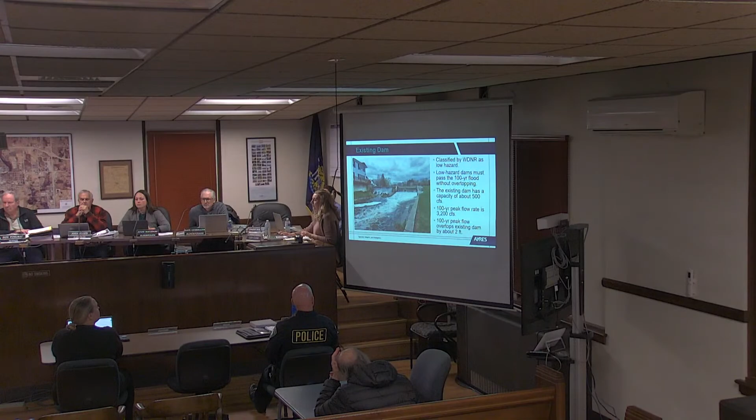So to start with going over the problem with the existing dam, it's classified by the Wisconsin DNR as a low hazard dam, determined in 2015 when the dam failure analysis was done for the Mullet River Dam. Low hazard dams by Wisconsin statute need to be able to pass the 100-year flood without overtopping. The 100-year flood is a flood that's large enough that on average it's only going to be exceeded in magnitude once every 100 years.

So you can get floods of that magnitude occurring more frequently. It's not like once you have that 100-year flood, you're not going to get it for another 100 years, but on average, that's a flood that's going to be exceeded in magnitude once every 100 years.

So the existing dam has a capacity of about 500 cubic feet per second. That means it can pass 500 cubic feet per second through its existing spillways before it starts bypassing around the dam, overtopping. You can see the existing dam has two spillways. On the picture left side, next to that building, it's just a fixed crest overflow. On the right, it's a strange and unique timber structure with a concrete sill, but based on my understanding, those timbers that the water is flowing over are never removed. So that's the existing dam.

The capacity is only 500 cubic feet per second, but the 100-year peak flow rate is 3,200 cubic feet per second. That's right from the flood insurance study for the area. So obviously the existing dam doesn't come anywhere close to being able to pass that storm.

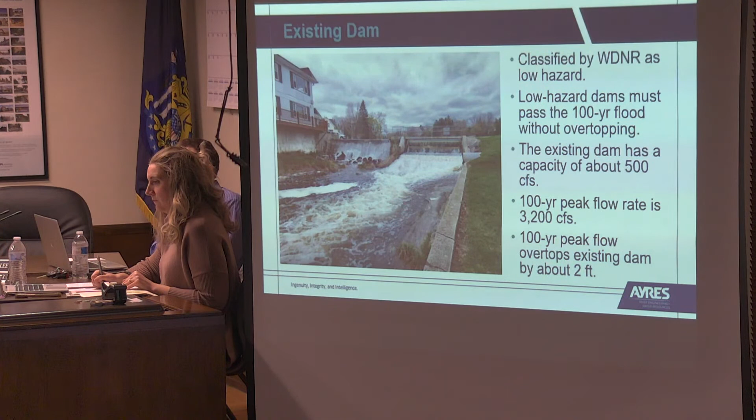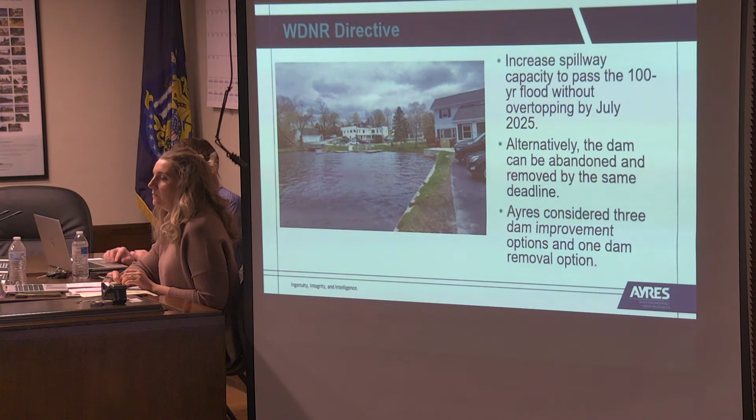The DNR issued their directive in 2015 to increase the spillway capacity by 2025 so that it can pass that 100-year flood. As an alternative to modifying the dam and increasing spillway capacity, another option is the dam can be abandoned and removed. Either of those would meet the DNR's requirements.

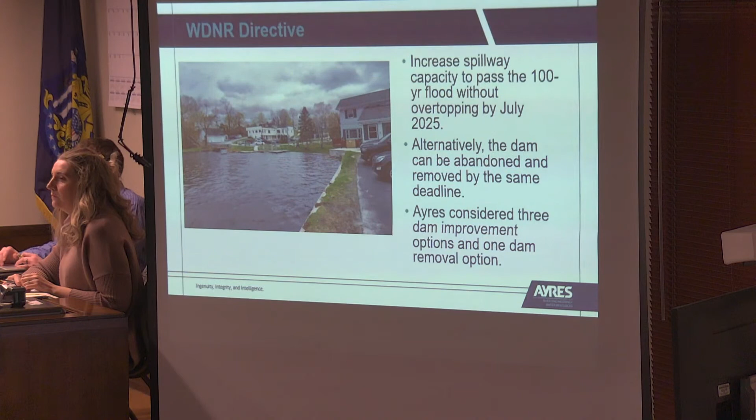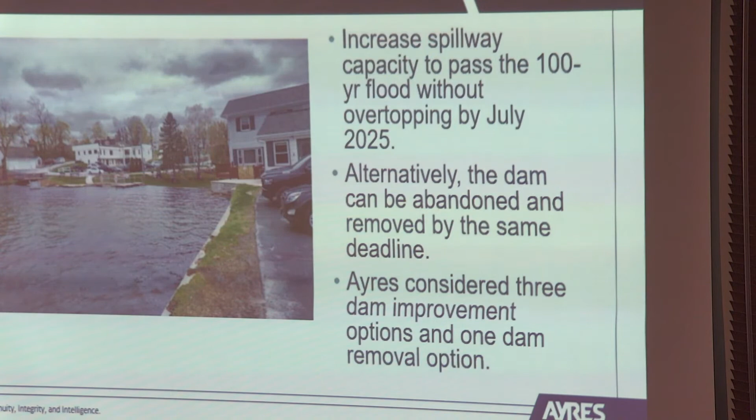So we looked into 3 dam improvement options. When I say dam improvement, that just means modifying it so it has the spillway capacity needed to pass that 100-year flood event. And then we looked at 1 dam removal option. I'll go through those right now.

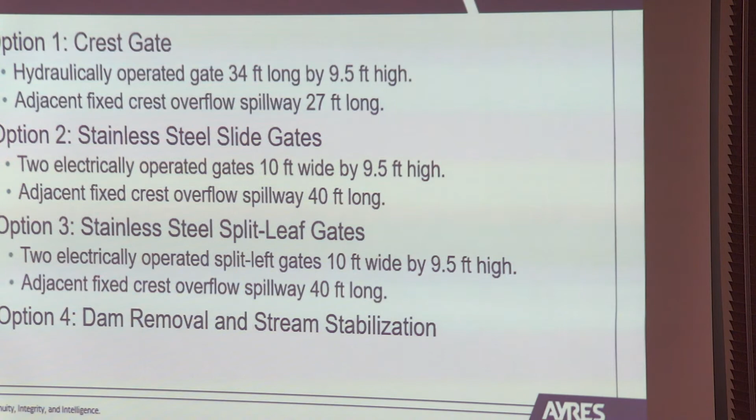Option 1 was a crest gate. This is a hydraulic gate, and I'll go through each of these in more detail. The crest gate is a large metal leaf basically that pivots about its base and can raise and lower, controlling the elevation at which water goes over it. That new gate would be 34 feet long and 9.5 feet high, and adjacent to that would be a 27-foot long fixed crest spillway like you currently have adjacent to that building.

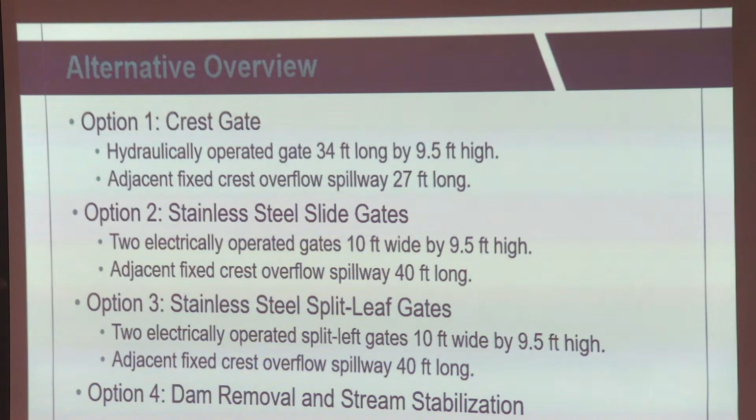Option 2, you swap out that big crest gate and you put in 2 vertically rising slide gates. Those would each be 10 feet wide by 9.5 feet high, and then a slightly longer overflow spillway right next to that.

Option 3 is really similar, also vertically rising gates, but each of the 2 gates is split into 2 panels. That'll be more clear when I go through that option in more detail. That again, just like the slide gate option, has a 40-foot long fixed crest spillway adjacent to it. And then option 4 is dam removal and stream stabilization.

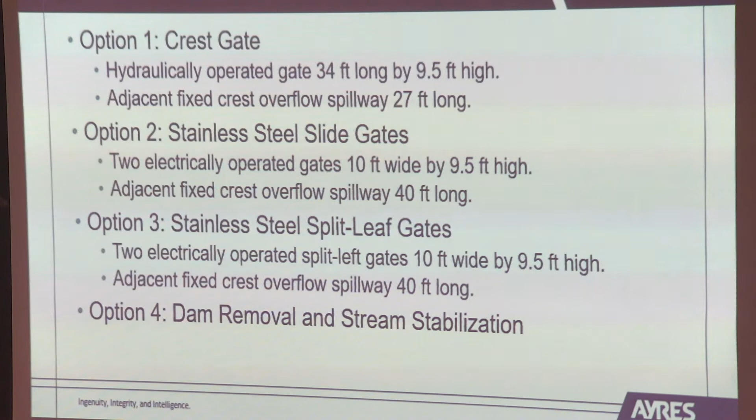So here is a 3D look at what that crest gate looks like. In the upper left, that's the fixed crest spillway I was talking about, which I believe was 27 feet long. The existing building that's there would still be just adjacent to that fixed crest spillway.

And then to the right of that is that large crest gate, and you can see, kind of imagine how that crest pivots about its base on a hinge and can lower to let more water through the dam. That fixed crest spillway we set to the elevation of your current fixed crest spillway, and the idea was we didn't really want to be sending any more water onto that side of the dam because of that building that's there.

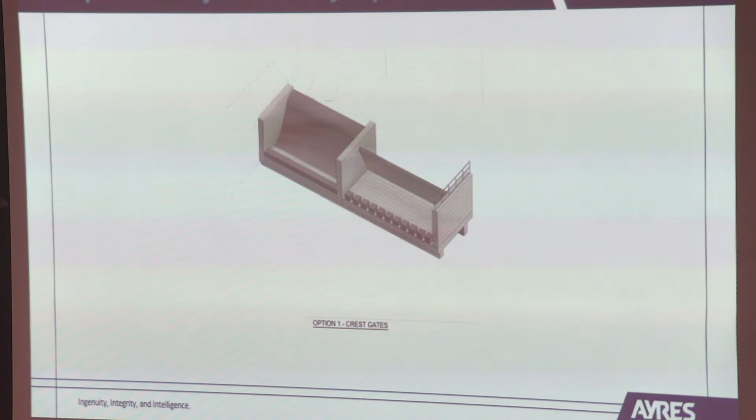We're really tight about what you can do there, so we didn't want to be sending really any more water adjacent to that building. So the vast majority of flow coming through the dam is going to be coming on river left through that crest gate adjacent to the city's park.

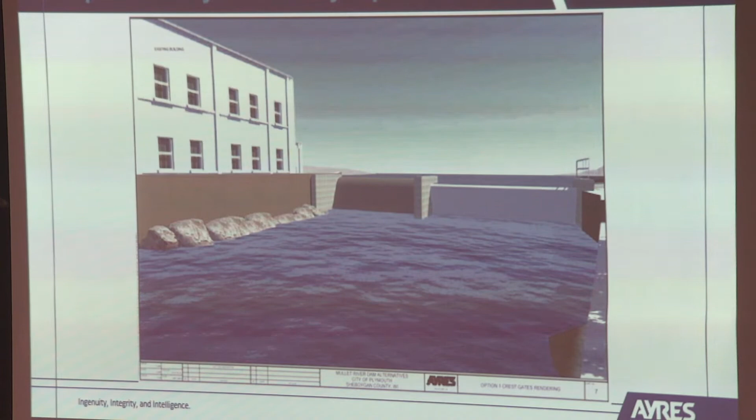This is what it looks like plopped in. It's our engineer's rendition, not an architect's rendition of that building, but it's white and 2 stories. We have that fixed crest spillway next to it, and then the crest gate just to the right of that. Those 2 spillways fit right within the footprint of your existing dam, basically, so there wouldn't be a significant takeaway from your current park space.

These are some pictures to give you an idea of what these things look like in real life. That one on the left is the brand new crest gate that was just installed a month or so ago up at Sheboygan Marsh, putting that thing into place. That gate is actually roughly the size of what you would need in your dam. It's hard to believe, but that gate is 10 feet high and about 25 feet wide. Your gate with that option would be 9.5 feet high, but 34 feet long.

So your gate would be a little longer than that. You can see the hinge at the bottom, and it's not installed yet, but there's a big hydraulic arm that can lift and lower that gate. Those gates are hydraulically controlled from an enclosure that would be adjacent to the dam, so you don't have to actually get out on the dam even to operate it.

That other picture on the right is in Grafton. That's kind of a similar configuration to what you have here, where you can see Grafton has that fixed crest overflow spillway that water is currently flowing over, and then their crest gate is about 8 feet high, I think, and that was maybe about 20 feet wide. So again, order of magnitude kind of on the same range of what you would be looking at.

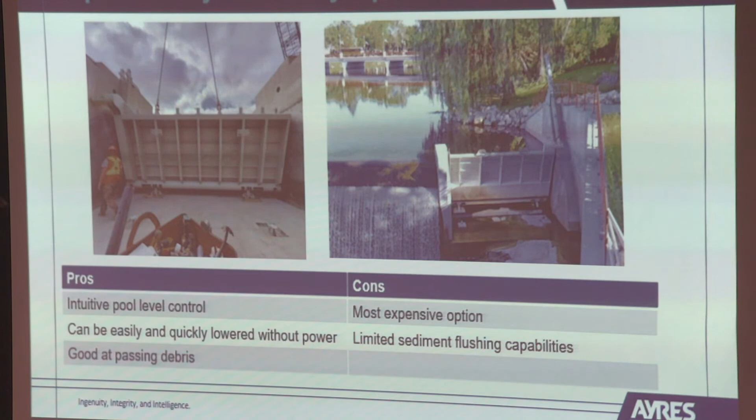Thought I'd just go over some of the maintenance requirements. That picture on the left is the Sheboygan Marsh crest gate, fully lowered with water flowing over it. That was taken shortly after that installation I showed you previously.

From a maintenance perspective, there's some routine yearly maintenance. The gate should be exercised yearly, not necessarily through its full range of motion, but you want to keep that thing moving. Every spring when there's snow melt, conditions in general will give you opportunities of its own to exercise the gate. But they need to be lubricated and looked over on a yearly basis.

There's painted steel, so every now and then painting is required. It seems to be kind of a 15 to 20 year thing, but all of these timelines are really variable. So it's hard to guess, but I just kind of threw out what we normally see.

These have side seals that keep water from going between the gate and the concrete abutments. Those need to be replaced every 15 to 20 years. And changing the hydraulic fluid is something some dam owners never do. If you follow the gate manufacturer's guidelines, they usually say about every 5 to 10 years to swap out the hydraulic fluid. That's about it from a maintenance perspective.

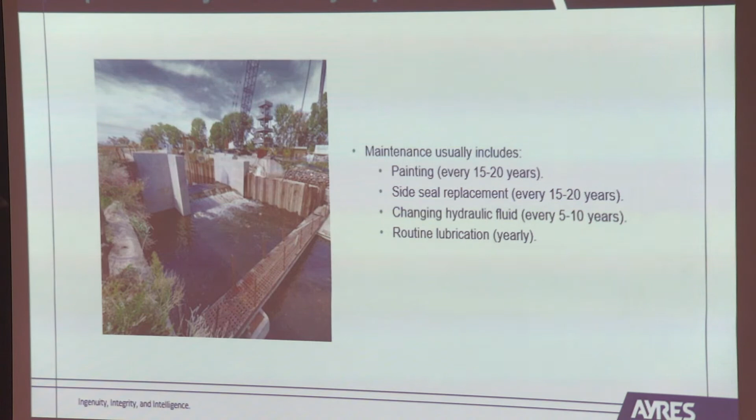All right, option 2. Here we have that fixed crest spillway again, but it's going to be a little longer, going from 27 feet to 40 feet. And then we're going to get rid of the crest gate and swap in 2 vertically rising slide gates. This is, again, the engineer's rendition. The 2 slide gates are on the right. These are just big steel panels that lift straight up out of the water, so water comes underneath the gate as opposed to over it.

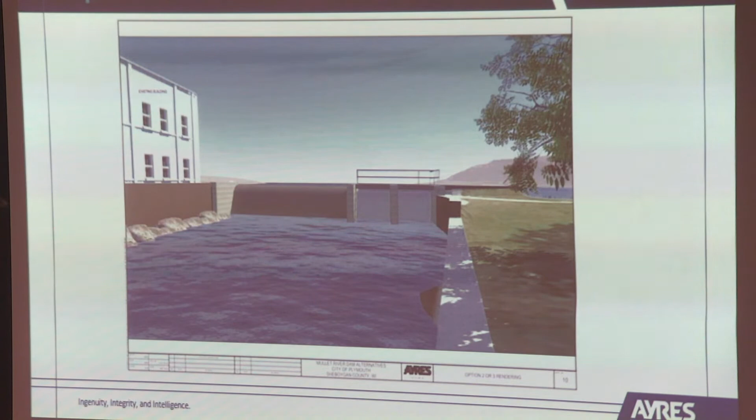Here's some real life pictures. That one on the left is in Ogdensburg, kind of up by Wisconsin Rapids, Stevens Point, that general area. That one on the right is up in Moose Lake, way up north. You can see big giant panels, a big shaft connected to the panels, and then there's a motor, the gearbox, that lifts the panels out of the water and water comes underneath. It's a pretty simple setup. This will be your cheapest option.

They don't have much for maintenance requirements. The big thing is they're stainless steel, so there's nothing really to paint. They do require yearly greasing, things like that, but there's not much for operations and maintenance. And with that bottom draw, you may get some beneficial incidental flushing of sediment from the pond. So those are kind of the pros of this type of setup.

Drawbacks: they're not as intuitive to operate. Unlike the crest gate, where you lower the top of the gate an inch and you can expect the pond to go down an inch, with these there's a little more trial and error figuring out how the pond will respond to how high you have each of the gates open. But that can be figured out with experience. It's not an insurmountable challenge, but it's not as immediately intuitive to operate. And since water flows below these, they're more likely to catch debris and get debris stuck on the upstream side of the dam that you'd have to deal with.

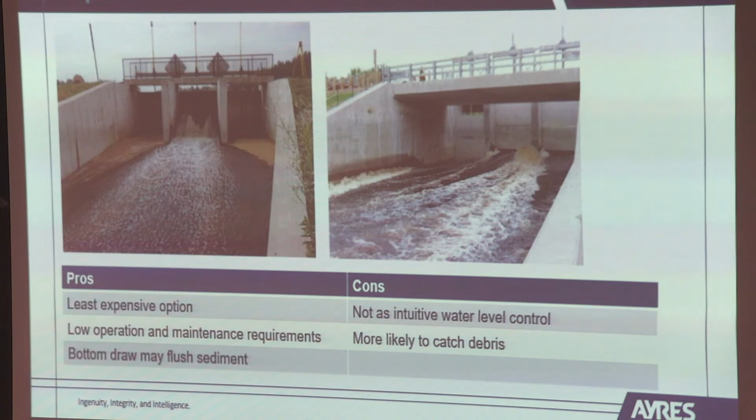Maintenance is pretty basic. These have side seals, just like the crest gates, where there's a seal between the big stainless steel panel and the concrete abutments. Those seals, usually made out of neoprene, every now and then start to leak and have to be replaced. That's a 15 to 20 year item usually. The gearboxes for the motors, the actuators that lift the gates, sometimes need maintenance every 15 to 20 years. Usually what needs to be done is the gearbox just needs to be rebuilt.

But again, sometimes you see dams where they never have to do anything with them, so it's really hard to say, but just giving you some general ideas. Yearly maintenance is really just exercising it and keeping it greased. Not too much going on here to take care of.

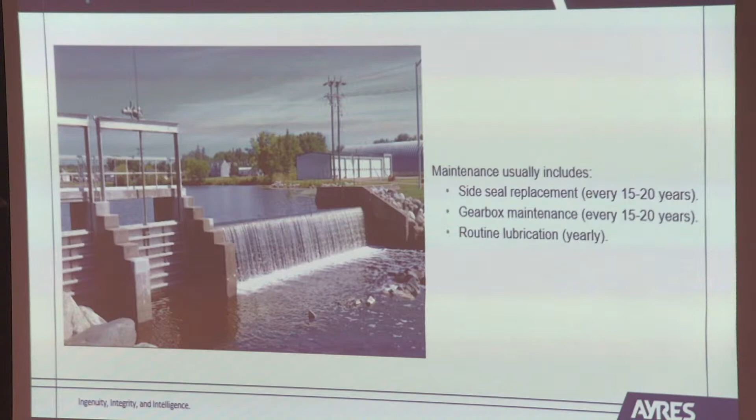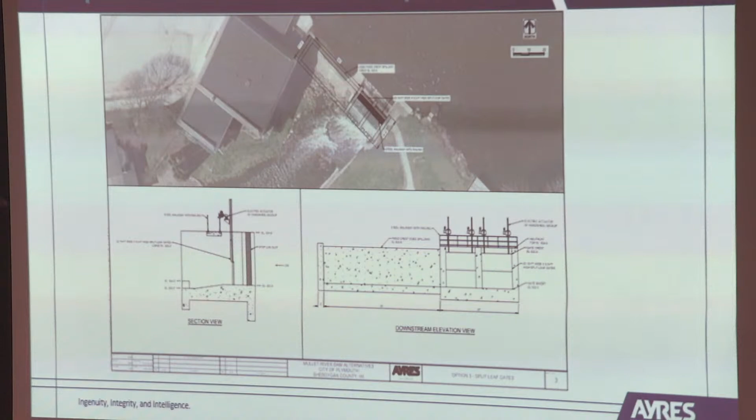This is a third option: stainless steel split leaf gates. They operate very similarly to the previous one I just showed you, but each of the gates has 2 panels, which you can see in the lower right drawing below the photo. There are 2 gates, each the same size as the slide gates were, about 9.5 feet high and 10 feet wide. But each gate is broken into 2 steel panels. I'll show you some pictures.

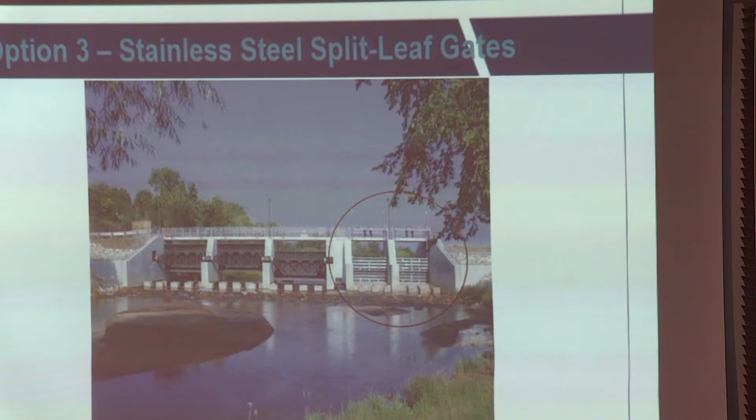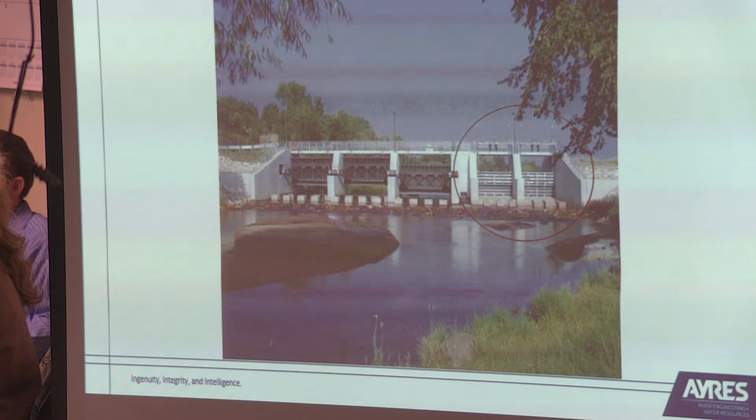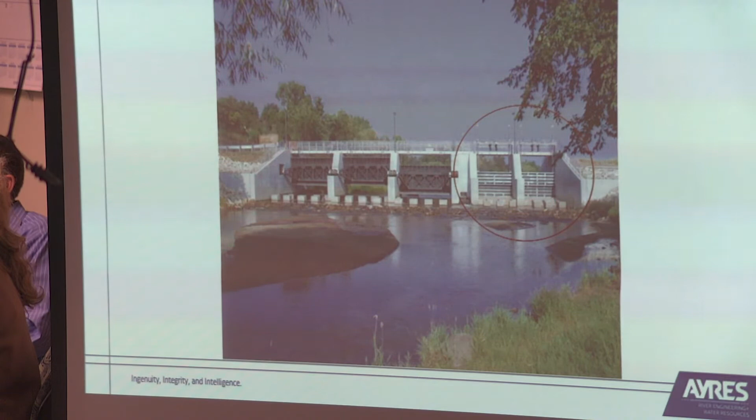This is one up in Bloomer. The split leaf gates are circled on the right, and you can see there are 2 panels. Each panel usually has its own actuator, though it doesn't have to be this way, so they can lift and raise separately. That top panel can be lowered to let water over the top, or alternatively both panels can be simultaneously lifted completely out of the water to let water flow underneath. So these are like the slide gate in a flood, because you can get both panels out of the water. But during more normal periods, where you want to fine tune your flows through the dam and control your water level, you can just lower that top panel to get more water going over the top.

So this photo is good. I think this is Fox Lake.

You can see there are two gate bays. The one on the right has that upper panel raised to its closed position, so you don't have water going over the top. The one on the left, you can tell that upper panel is lowered a couple inches, and water is flowing over the top. These gates are nice because they're cheaper than the crest gate, but they give you that top flow capability that can make day-to-day water control really nice. During a flood or spring snowmelt, when you need more water through the dam, you can envision both panels being completely lifted out of the water, and water can flow right through those concrete gate bays.

Going through the pros and cons, on the positive side, these are nice because you can get weir flow over the top or sluice flow below through the bottom. So they afford you more flexibility. They're more intuitive to operate because you can fine tune your water levels in the lake by lowering that top panel.

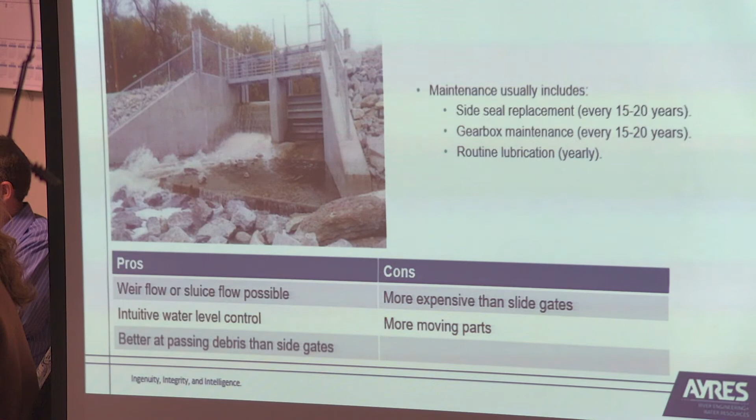So those were the three dam improvement modifications. The fourth alternative we looked at was removing the dam and stabilizing the stream. This is an option that has a lot of different possibilities that are plausible should the dam actually be removed.

Talking it over with Tim and Kathy, for this study we decided to remove the dam and keep things in the upstream impoundment more natural, and the reason for that will become more clear as I get through this. Certainly from a technical standpoint, there's nothing to keep you from removing the dam and, for example, putting recreational features in the lake bed. That's not difficult to do technically, but from a more logistical standpoint, that's more challenging, and I'll get into that.

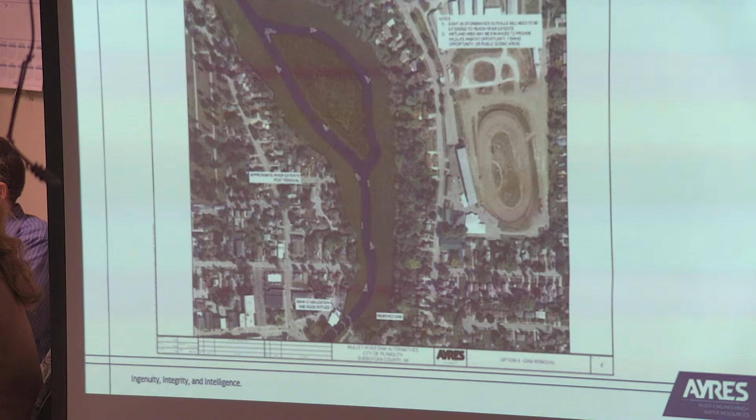We do know, based on past drawdowns, that we expect to see the main channel of the river come to the left side of Picnic Island and head toward the dam. But I think you could also grade it such that water bifurcates and goes around both sides of the island if you removed this dam. Beyond that, what we considered were removing the structure and stabilizing the stream bed. We didn't consider any recreational enhancements, park space, or anything like that. I'll get into that in a minute.

So the benefits of dam removal: there certainly are ecological and water quality benefits. There's no doubt that letting the water flow helps things in that regard. These low head dams generally don't have much in the way of ecological benefit compared to a fresh running stream, so that's definitely a pro. It's also the lowest cost alternative. Removing the dam and stabilizing the stream can almost certainly be done cheaper than improving the dam.

There is a possibility for some recreational enhancements. We didn't get into that because MSA did a corridor study back in 2015 where they laid out detailed recreational enhancements and improvements in the lake bed should the dam be removed. There was no need to reinvent that wheel. All that stuff they have in there is possible, and it's something you definitely could do in the lake bed.

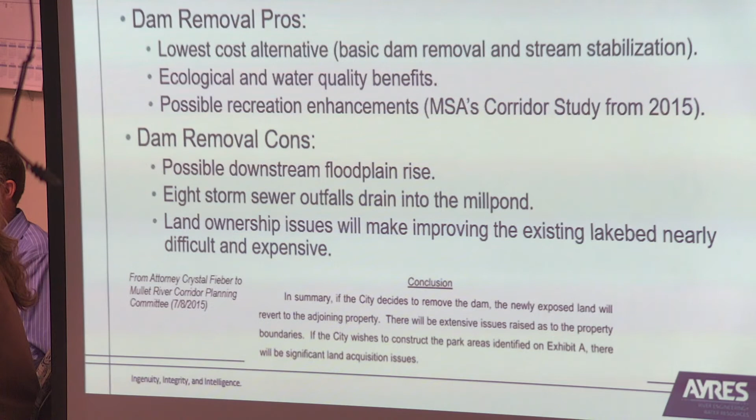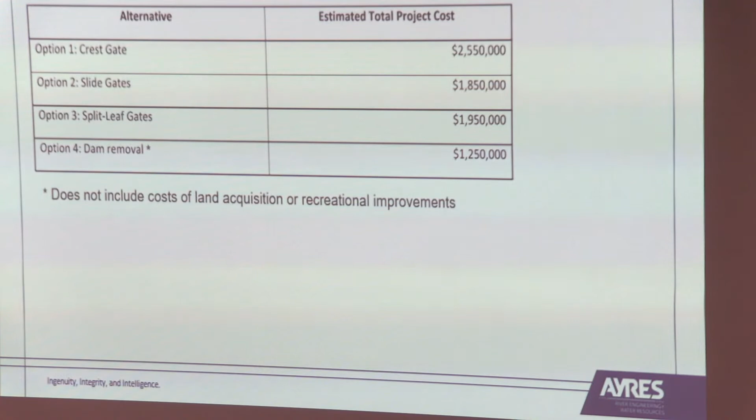But that's kind of where we left off with the dam removal. Like I said, MSA's corridor study from 2015 laid out a lot of possibilities for that space, but they acknowledged that it'd be very difficult to pull off. It'd be difficult to do anything really but just remove that dam and have very low impact natural development in the lake bed.

So these are the cost estimates for each of these options. Like I said, the crest gate option is the most expensive, that was about 2.5 million. The slide gates and the split leaf gates are similarly priced, but the split leaf gates, those 2-panel gates, are about 100,000 more, but they're both around the 1.8, 1.9, 2 million range. Basic dam removal and stream stabilization, we think, would be in about the 1.2, 1.3 million range. So again, it's the cheapest option.

That doesn't include costs for land acquisition, which is out of my wheelhouse, but I can't even imagine what that could be. And then that doesn't include any sort of recreational enhancements either. That's a very basic, get the dam out of there, make sure the stream is stabilized, and let it be.

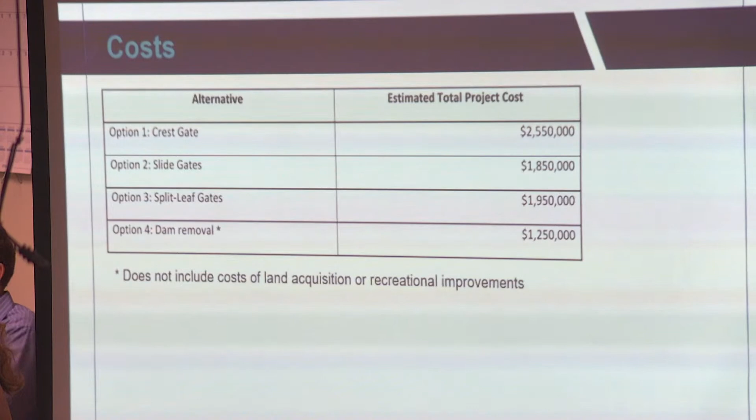When MSA went through and assigned a cost estimate to their dam removal with all of their different recreational options, it was closer to 1.5 million, and that was 8 years ago. But they also said they didn't include the cost of land acquisition. So, all right, that was cost.

Floodplain impacts. Modifying the dam has a significant, it seems, benefit to the floodplain situation. So the city is in FEMA Zone AE, so it's a regulated floodway. And if the dam were modified with any of those three options, the 100-year headwater, so the water levels upstream of the dam, would go down over 2 feet. And then downstream of the dam, they actually also go down a little bit too, and that new gate will be able to let more water through the dam.

So it's not intuitive why downstream you'd also see a drop. You'd think if you're letting more water through, you'd lower the flood level upstream of the dam, but downstream it would have to go up. But the thing is, with the bigger gate, it can let water more readily through earlier in the event and not build up such a big head behind it. So you see a pretty net flood benefit both upstream and downstream of the dam by getting that spillway into compliance.

Since these are FEMA Zone AE, you would have to go through the FEMA letter of map revision process after the project is complete with the dam modification alternatives. However, based on my understanding, since you're lowering the flood elevation, you don't have to go through the conditional letter of map revision process, the CLOMR. The CLOMRs are needed to get authorized to actually do the construction project. If you're doing something that will modify the floodplain elevation, the LOMR is what you have to do after. For the dam modification alternatives, it seems like you'd only need to do the LOMR at the tail end.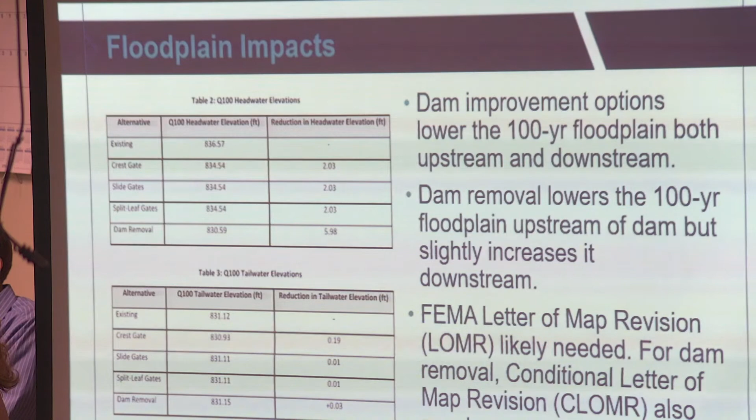None of those are insurmountable things. People deal with them all the time when working in a floodplain, but they do add some cost to the process. The key takeaway is, from everything we can see so far, the dam modification alternatives will just require a LOMR at the end of the project. Dam removal would also need a LOMR, but may also need the CLOMR to get authorized to do the project too. Either way, there's FEMA stuff to deal with.

Just a quick thing about funding opportunities. The city has received a commitment of $1 million from the Wisconsin DNR, and that can be used for either dam improvement or dam removal. So that's good.

There's also the Knowles Nelson Stewardship Grant. That would really only be applicable here for dam removal, but it could defray some of the costs of land acquisition for the lake bed restoration.

And then there's this Army Corps of Engineers Section 206 program. This is for dam removal projects only. It's quite the ordeal, but some communities go through with this. Basically, you get the Army Corps of Engineers involved, and if they agree to take it on, they control the whole project, and there's a cost share involved. They start with a feasibility study, and the federal government will pay up to $100,000 for that, then after that it's a 50-50 cost share.

For design and construction costs, it's a 65% federal to 35% local split. I think usually to get these programs to pay off, you've got to have a really big project on your hands. The city would still be responsible for land acquisition costs and the costs of obtaining easements. It's an option. I don't know how feasible it would be here, but I wanted to put it out there just so that it's available for your information.

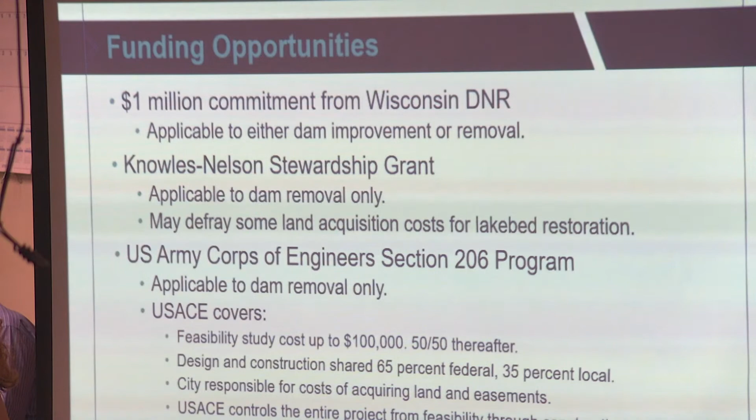All right, next steps. So there is $1 million in funding committed from the DNR. That's yours. But there still is a process you need to go through if you want to use that funding. For one, you need to decide on an alternative, and that doesn't have to be set in stone. You're not committing to any particular project, but you have to commit to something that has a cost estimate associated with it. Then you get this money by applying for the WDNR's municipal dam grant.

So for this cycle, applications are due March 1st, 2024. Prior to that date, the city will just have to have an idea for what they want to do here that they can apply for the grant with. And like I said, you can change your mind. It doesn't have to be something set in stone. You don't even necessarily have to know if you're going to improve or remove the dam. You just have to apply with something. It's important to get that application in to stay on track with getting your $1 million.

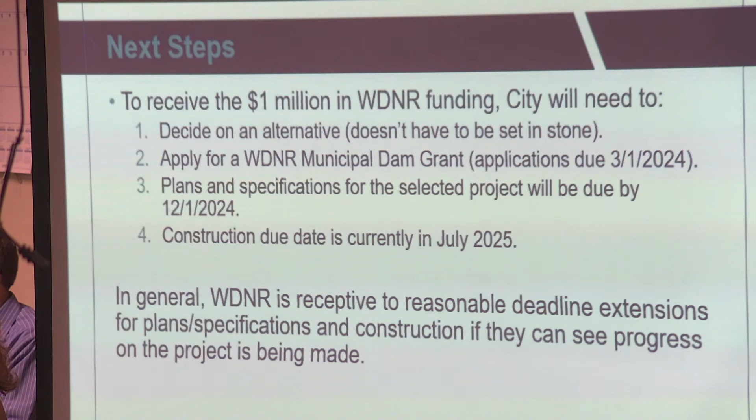I wanted to close with a similar situation we went through last year in Burlington for their Echo Lake Dam, right in the middle of their downtown. They also, like you here in Plymouth, had a directive from the DNR to increase their spillway capacity. The city wanted to know what the community wanted to do about that - improve the dam or remove it. So they did some early informal polls asking residents to save or remove the dam. I'm not putting this process out here as a recommendation, just wanted to give you an idea of what another community did under similar circumstances.

They did some polling and found that, based on the people who responded, about 2 to 1 were in favor of getting the dam into compliance and keeping Echo Lake. So the city hired us to do a feasibility study, just like this one, to look at different dam improvement and removal options and present those. We did that back in November of 2021.

They weren't really satisfied enough with that yet. There were strong voices on both the keep-the-dam and remove-the-dam sides that wanted more information. So then they commissioned us to do a master planning study of the adjacent park - there's a park to the southeast of the lake, immediately adjacent to it. The idea was to do a master plan of the park with the dam improvement option, and then another master plan for the park with the dam removal option, and then balance out the costs so each project was the same.

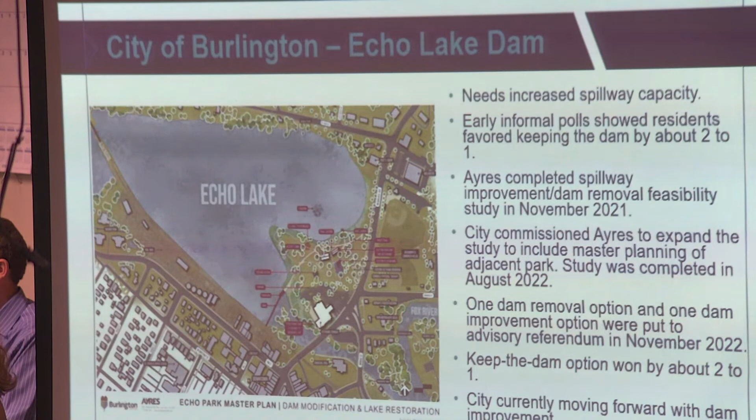These are the two options I was telling you about. The one on the left keeps the dam in place, with park improvements that don't matter to what we're talking about here. The one on the right removes the dam and basically makes that whole lake bed added park space, improving it along with it. These two options were cost-neutralized and put out to referendum.

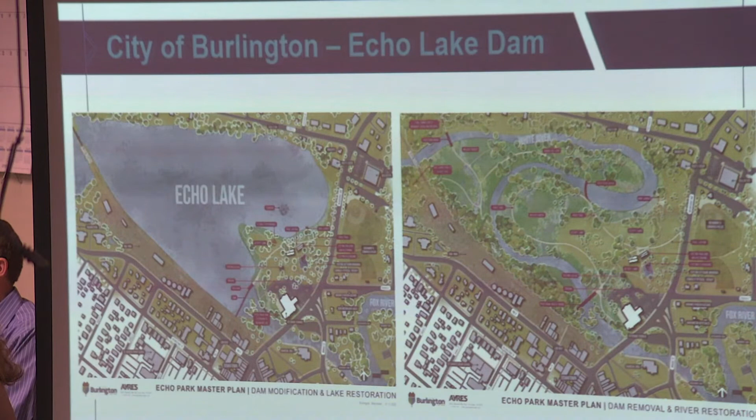Their dam removal option was simpler here because they didn't have that same land ownership challenge that you have. The city was confident that land would be theirs following dam removal, so there would be freedom to develop it as they saw fit. But that's just what Burlington went through - it's certainly not always the case; that's the most extreme example we've dealt with.